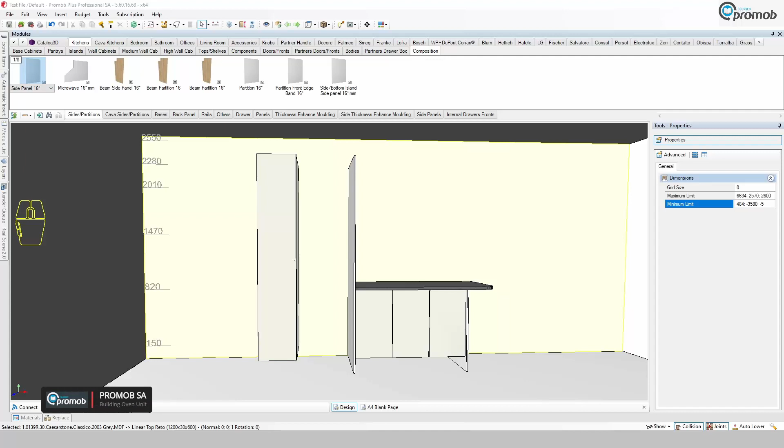So what I've done, I've just created a scenario where I've got a 400 cabinet. So if we just say open, just so that you can see it's a wide cabinet. And in fact, I want to make that open the opposite direction. So let's just go down here and mirror that. So you'll see I've got that over there. And then I've got an opening of 600. And then I've got some cabinets here with a little worktop and a side panel, just to show you how you can put this all together.

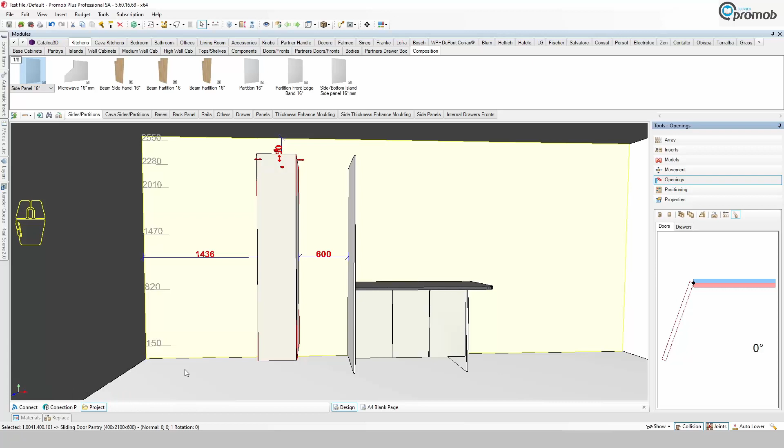So once you've designed an area and you want to start working on it, what we have to do is we just have to click on the actual wall. It'll turn purple. And just by the way, on the side here, you'll see an outline of my mouse. You'll see what I'm clicking. So all I've done there is to select that wall. I've just clicked my left mouse button.

And then what I'm going to do is, while that is highlighted in the purple, I'm going to come up to the top and I'm going to choose this one over here, which is Build Closet, and I'm going to left click there. It's now going to give me some options. I'm going to go to Kitchen, and I'm coming down to Cabinet for Appliances without a kick plate. This one is with a kick plate. This one's without a kick plate. I prefer to build them without a kick plate because my kick plate's going to run underneath it. It's not a permanent fixture.

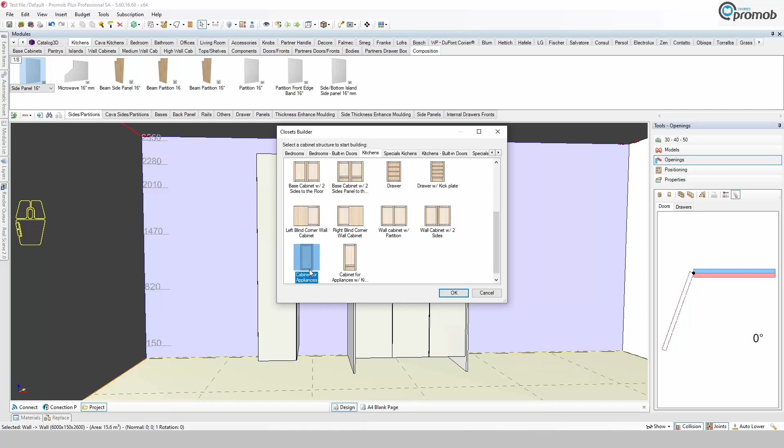So what I'm going to do now is I'm going to go over, I'm going to say OK. And what it's going to do is it's going to bring in this window over here. So let's make it bigger. So it's going to be a lot easier for you to see what I'm actually doing. Okay. So to make it simpler, I'm on here at 700. I actually want that to be 600. So up here, I'm going to make that 600.

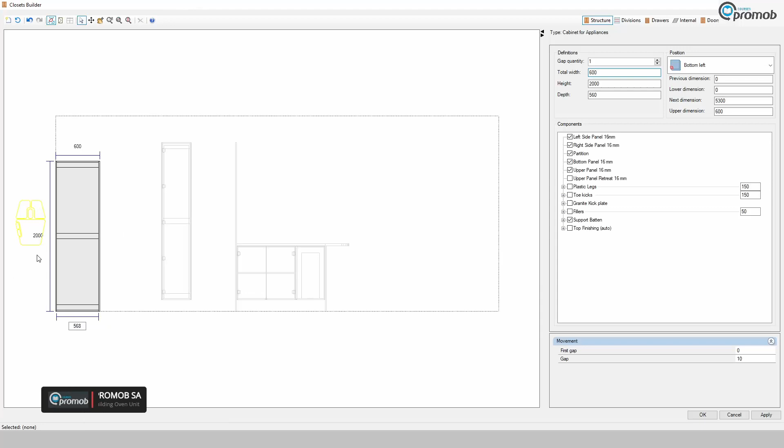Enter. And now just to make it more user-friendly and easier to use, I'm actually going to move this and place it where I actually want it. Now I know that this cupboard isn't the same size as that one, so I'm going to just change this. I think it's 2.1 if I remember right. 2100, there we go. And I want this to be 600 deep. 600 deep. So what I've done now, I've placed the cabinet where I want it within the drawing.

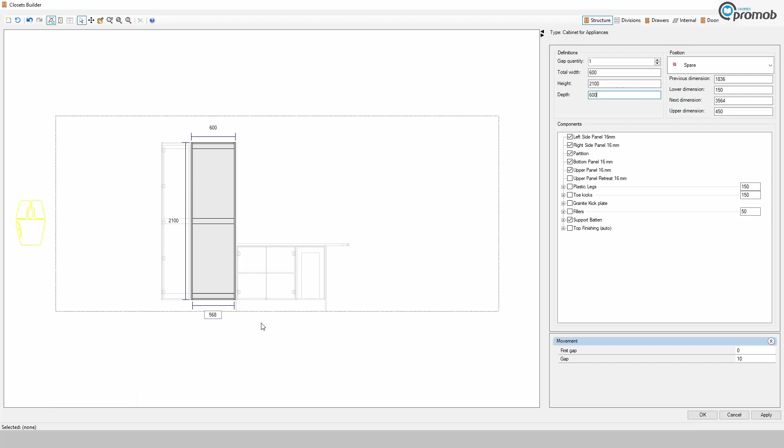I could have left it over here and just carried on. But by doing it this way, I can actually see how it's going to look and how I can line things up with what's already inside the drawing. Because now I can see where my worktop is, I can see the side panels, I can see where shelves are, whatever I want to do with it. So what we're going to do now is we're going to go over to the division section. And now we're going to divide this up into where we want things.

Now, if I'm going to be doing an oven on its own, I'm going to line it up, obviously, with the worktop and make sure that the oven is sitting up here. But because I'm going to be doing an oven and let's do a coffee maker in the same unit, or could use a microwave, whatever you want, I'm actually going to lower the oven a little bit and then have the coffee maker above it.

So what I'm going to do, let's start off. I need some horizontals. I'm going to click on the horizontal. I want fixed shelves. And I'm going to have a look here. I'm going to use a fixed shelf. I'm going to use this one over here. So what I'm going to do is I'm going to highlight my cupboard. And you'll see these have now changed to orange. I'm going to just click on this with it being held.

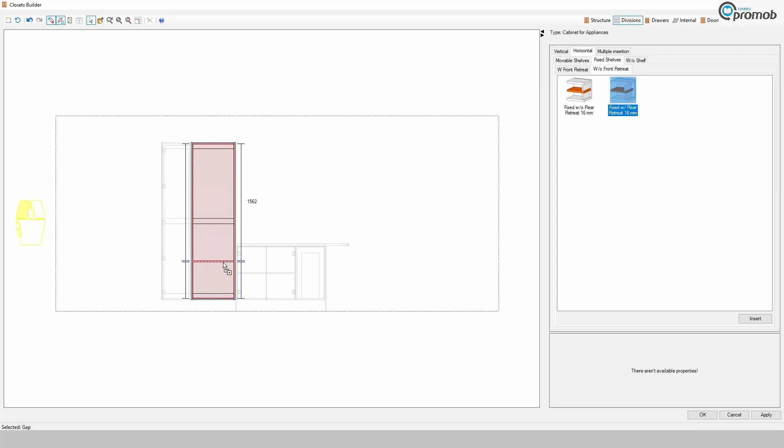Rather than pressing insert down here, all I'm going to do is drag it in and let go. Now my partition, my shelf, whatever you want to call it, is sitting in the right, well, not necessarily in the right place, but it's in the cupboard. I'm going to need another one. So again, I can highlight the cupboard and bring in another one. And I'm going to bring in another one. So highlight above that and let's bring in another one.

Okay. So what we're going to do now is click on the shelf and you'll see I've got some measurements here. So I'm going to make this one 600 high. I'm just going to click. So from the bottom, 600, enter. I now know from that shelf to the base of my cabinet, it's going to be 600. This one I'm going to click on, and I want to make that 600, because that's where my oven is going to be. And then on this one, I'm going to make this one 400. That's where my coffee maker is going to go.

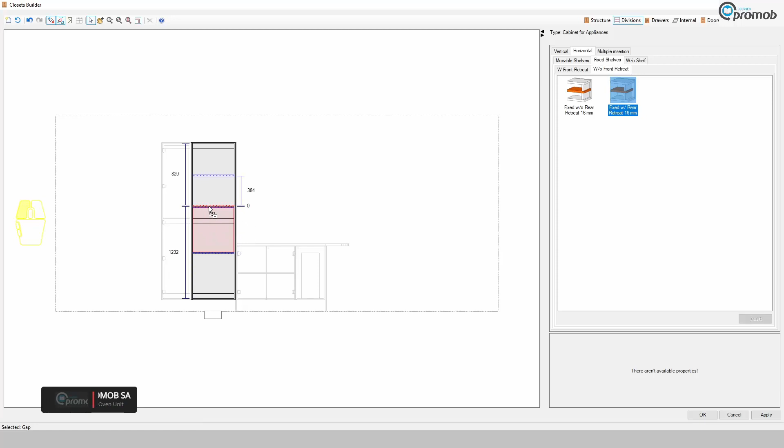Now, if I leave it like this and go ahead and make it through, it's fine. I can add my stove and my coffee maker, but the stove's not going to work, because you need two shelves here, or two sections for the stove and for the coffee maker, because they overlap slightly, to actually mount them. So I'm going to take another one and drag it inside here, and drag it up so it butts up like that. So now I've got two panels there, a space there, space there, space at the bottom.

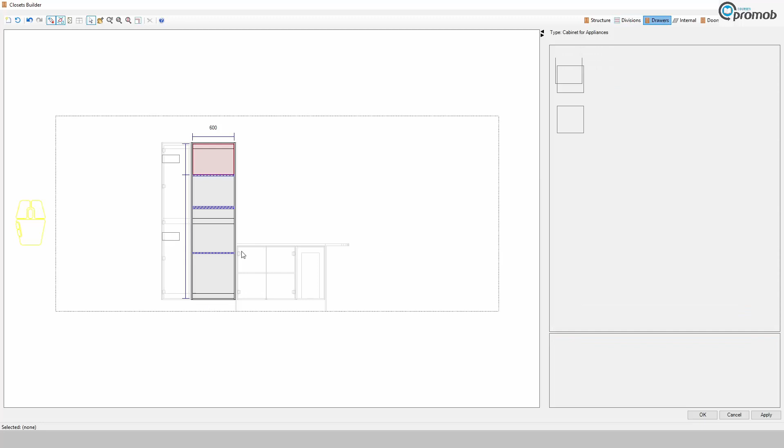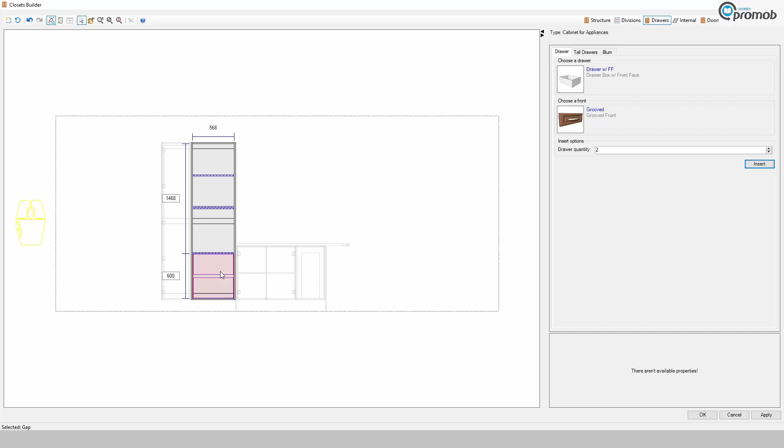Okay. So now let's put some drawers in at the bottom. I'm going to go to the drawer section over here. I'm going to click the bottom because that's where I want my drawers to go. I'm going to click on the straight doors, and let's make the doors wood. And I'm going to give them a groove just to show you what it's going to look like. Okay. I need two drawers. With this highlighted, I now click Insert, and my two drawers are placed. Very simple.

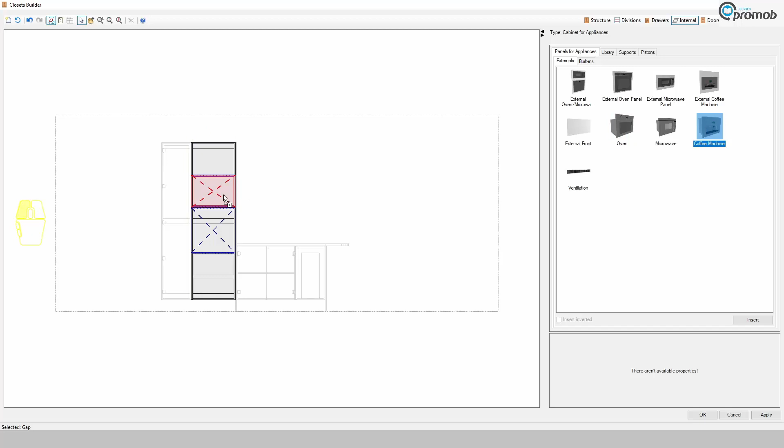And now let's put in the oven. So I'm going to go to the internals. I'm going to take an oven. So I'm going to click on here, take the oven, drag it in, let go. Okay. And now I want to put a coffee machine in. I'm going to use this coffee machine over here. I'm going to click here, take the coffee machine and drop it in. So now I've got my oven and my coffee machine in place. My drawers at the bottom are in place.

And what I'm now going to do is this top piece, I'm actually going to make it a cupboard, some doors. So let's go to doors. Okay, I'm going to make it a groove door. But what I want to do here is make it a lift door. So I'm going to say lift, groove, and insert. And let's put it in for me. Okay, so our cupboard is now made.

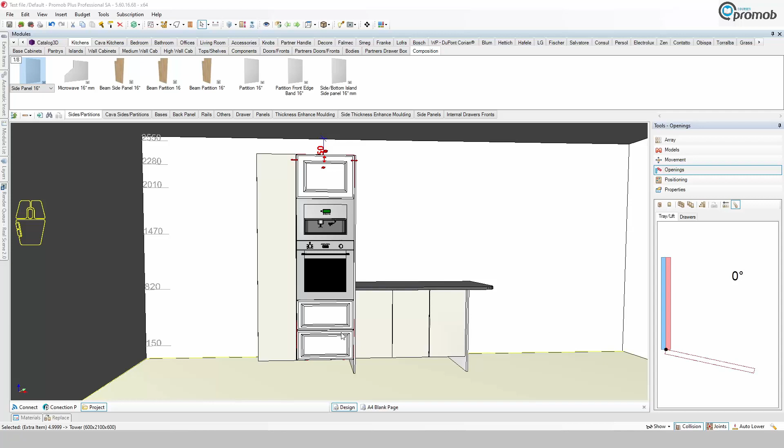So now we go down to the bottom and say apply. This takes a few seconds because it's calculating cutting lists, things like that already for you. There you are, it's done. I'm going to say OK. And it's now brought that cupboard into my design. My other cupboards are just normal flat cupboards, and they've got a color. These haven't got that yet. We can do that in a minute. But I just wanted to show you there is my cupboard. I've now got my stove, my coffee maker, and my cupboards.

So on this open section here, I'm just going to say open all. Okay. We could stagger it a little bit. And then here I've made a mistake. It's actually opening down. I want it to open up. I want it to lift up. And also, if you look, everything else is correct. Oh, by the way, I can just click on the stove and close that, so it's out of the way.

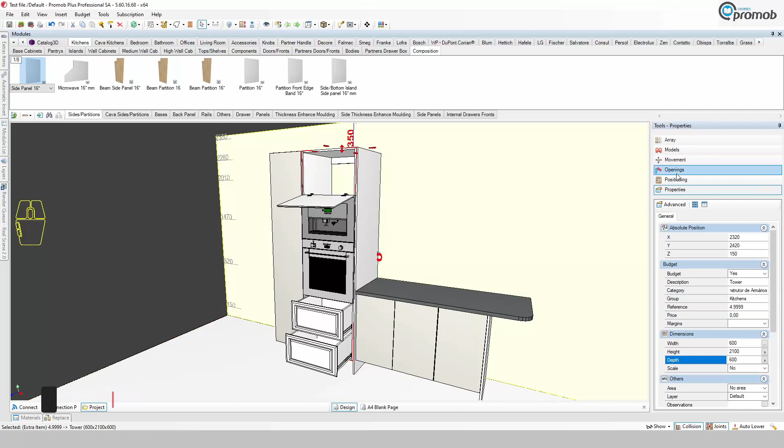Or I can just close it like that so that the stove is closed. But you'll see now the rest of it. That is correct. This is wrong. So what do you do? Because now obviously you've created this whole cupboard. And what are you going to do? It's not going to work if you need to change that door at the top.

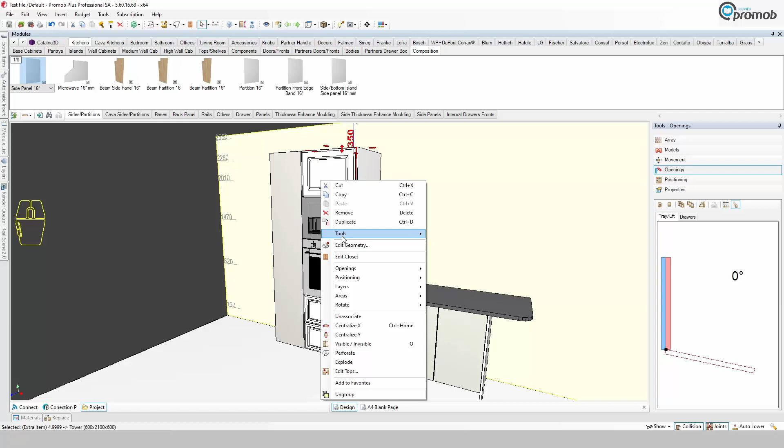It's quite simple in Promob. Just right click on the cupboard. Okay. Go back down to Edit Closet again. It's just jumped onto my other screen. I'll just bring it back so you can see it. And you'll see that my doors, I'm still selected on doors. I can highlight that area there. And I can see that my door is saying there, I want to go to lift. But instead of down, I want it to be up, like that.

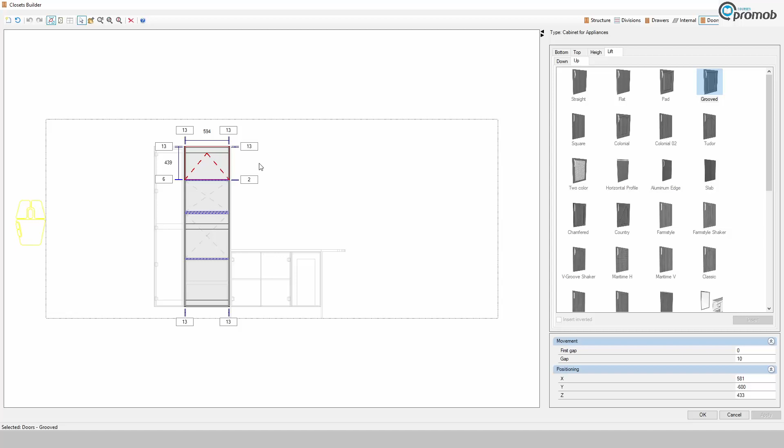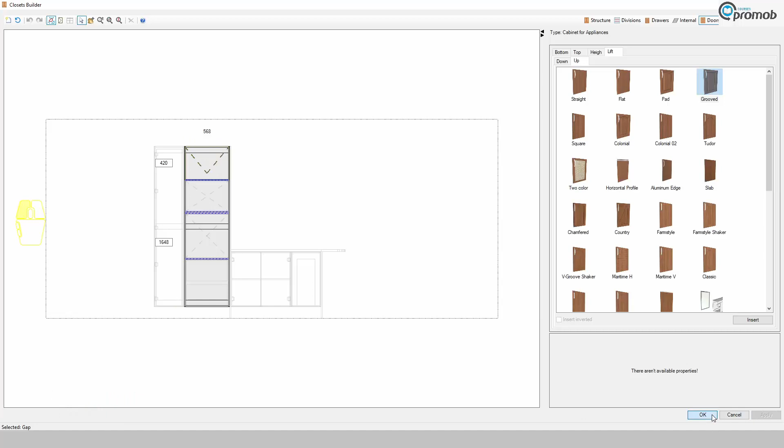And I can click on my door. So while this is highlighted, like that, what I can do is on my keyboard I can press delete and it takes that door out. By clicking back on here like this, I'm now going to go back to my groove. I've got it lift. Instead of down, I want it up. Insert. Now it's going to go up, apply, and OK. And now if we come to our sections and we say open all, you'll see that it now is lifting up.

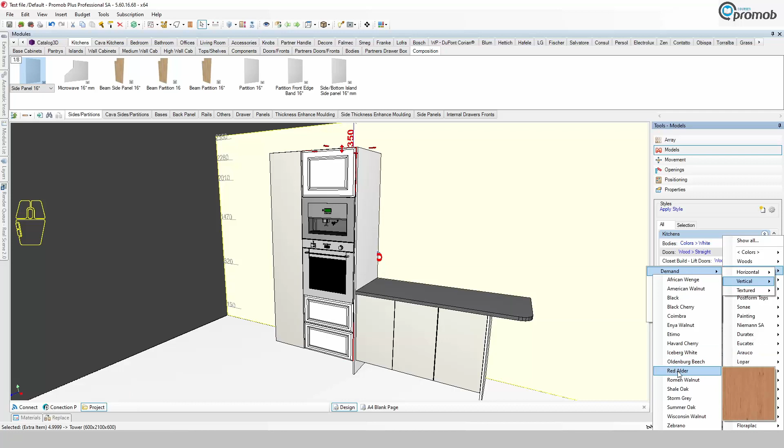Okay, so we've actually built an oven with a coffee maker in it, which is great. That all works well. The problem that we've got is if I look at this whole section, I now need to just color things up. Okay, so by looking at this, we've got super white, and then we've also got the gray tops. So I think what I'm going to do, I'm going to come over here, I'm going to say this groove, let's change this to a PG Bison, let's use a vertical, and let's use something a little bit different, something that we'll be able to see a little bit. Let's use this Romen walnut, and you'll see that it's changed that because I've got this one now selected.

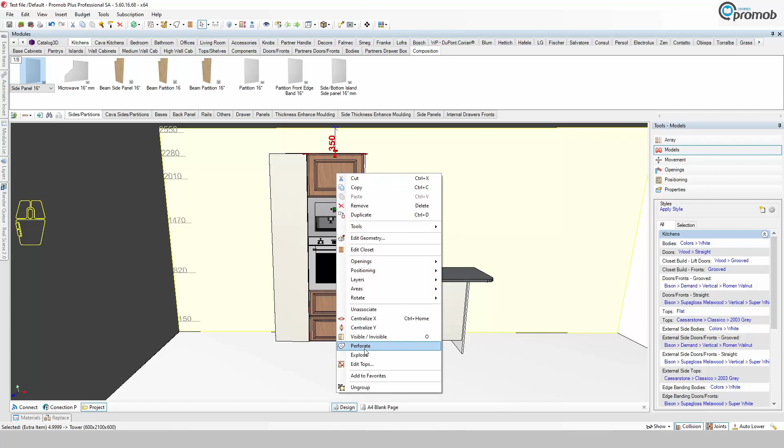Now let's say, for argument's sake, I'm happy with that, but what happens if I've got another job and I want to be able to do the same thing? I want to use that same cupboard, and I don't want to have to sit and go and build it. I've built it. It's exactly how I want it. Well, the advantage that you've got again in Promob is right-click on the cupboard, come down towards the bottom, down here, and you can add this to favorites. So what happens now is we're going to build a structure in our favorites for this particular unit.

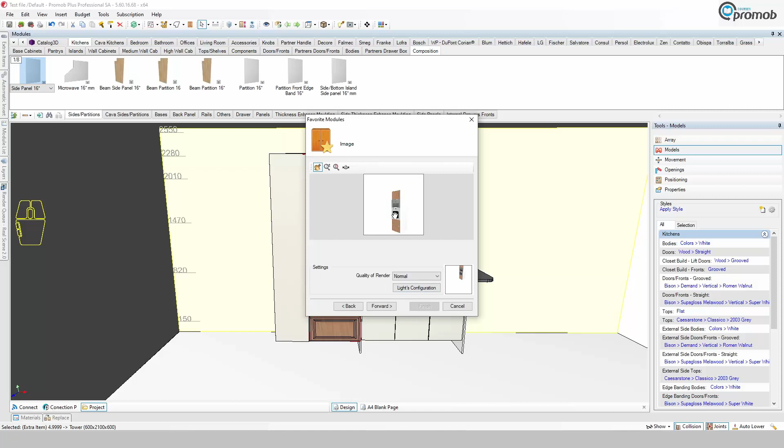So what we could do is we can call this, what should we call this? Let's say oven tall unit. Okay, I'm going to add the dimensions. It is a tower, so I'm going to just put here oven unit. Okay, I could even put slash coffee. Okay, and we can use that same one, so I'm just going to copy and paste. When I say forward, it's going to give me a preview, and I can just move this preview the same way as you do in your drawing. I'm happy with that preview.

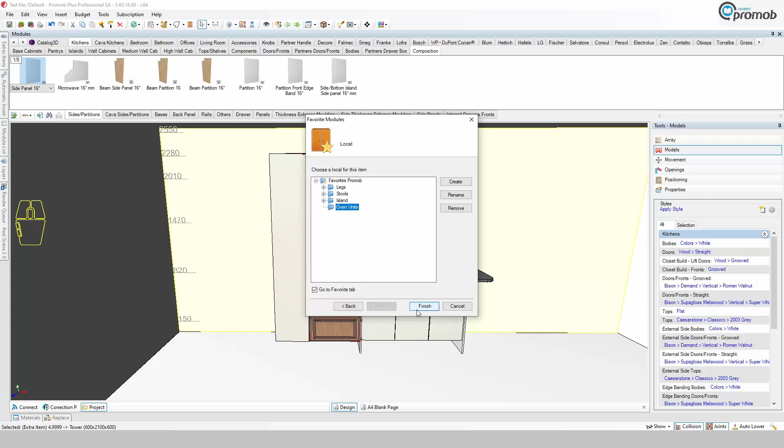Forward. And now I can actually create, I've got some for legs, for stools, for islands. I've built an island, and I've actually saved the island the same way. So I could use that same type of island in another drawing. So what I'm going to do is I'm going to click on the favorites, I'm going to come up here, and I'm going to call this oven units. Okay. While that's highlighted, I come down here and I say finish. And if I go to my favorites and I go to oven, there's my oven unit.

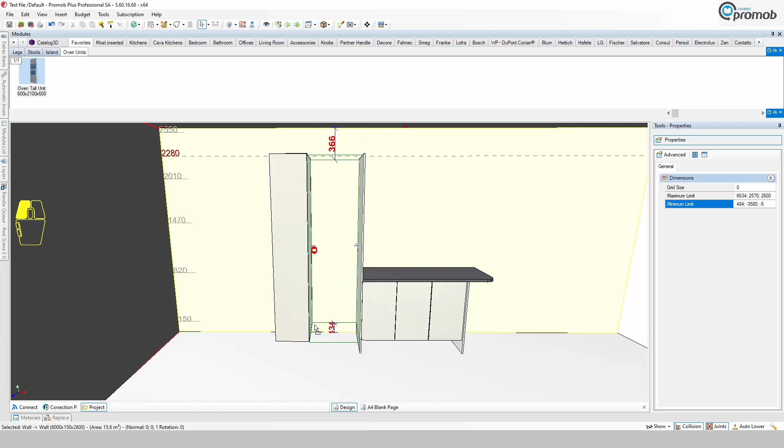So to show you, while I've got this one selected here, I'm going to right click and I'm going to remove it. So it's been removed completely. I'm going to take this unit and I'm just going to bring it in, drop it down. I'm just going to let go. It's at 150, and there you can see my oven unit is there. I hope this has helped.